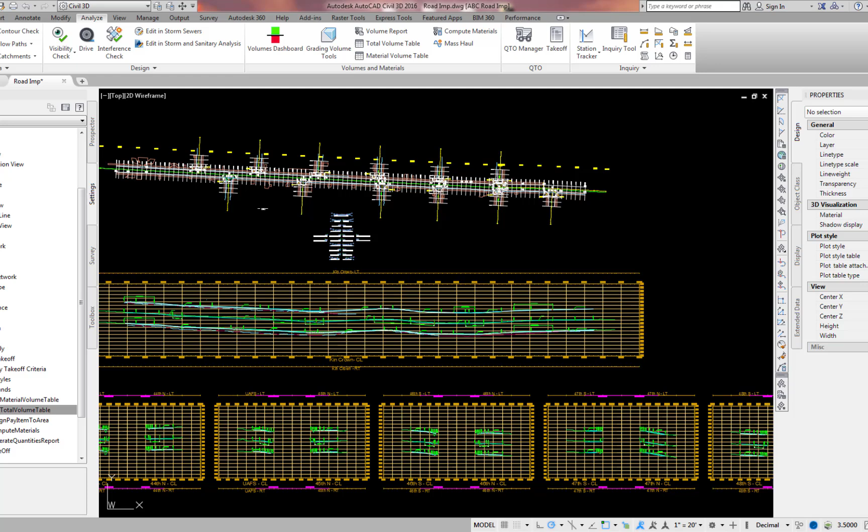Total volume tables. Earthwork cut and fill volumes are computed from cross-sections between the existing and datum surfaces using the average end area method. The volumes are computed separately for each sample line group. The sections are taken at the locations of the sample lines.

Quantity takeoff defaults: Settings, right-click Quantity Takeoff, Edit Feature Settings, Default Styles, quantity takeoff criteria, earthwork, material shape style, earthwork, default name format, material name template, material next counter, material list name template, next material list counter.

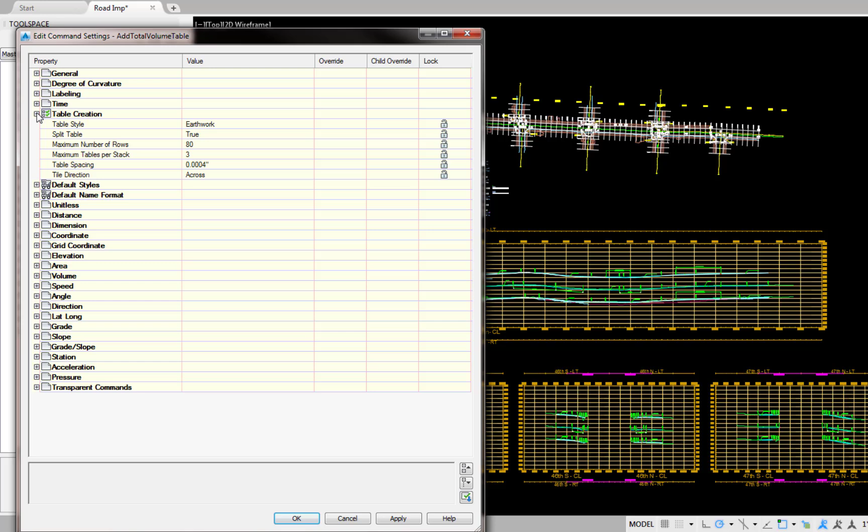OK. Expand Quantity Takeoff, Commands, right-click Add Total Volume Table, Edit Command Settings, table creation, table style earthwork, split table true, max number of rows 80, max tables per stack 3, table spacing 0.0004 inches, stacks are adjacent to each other, tile direction across, OK.

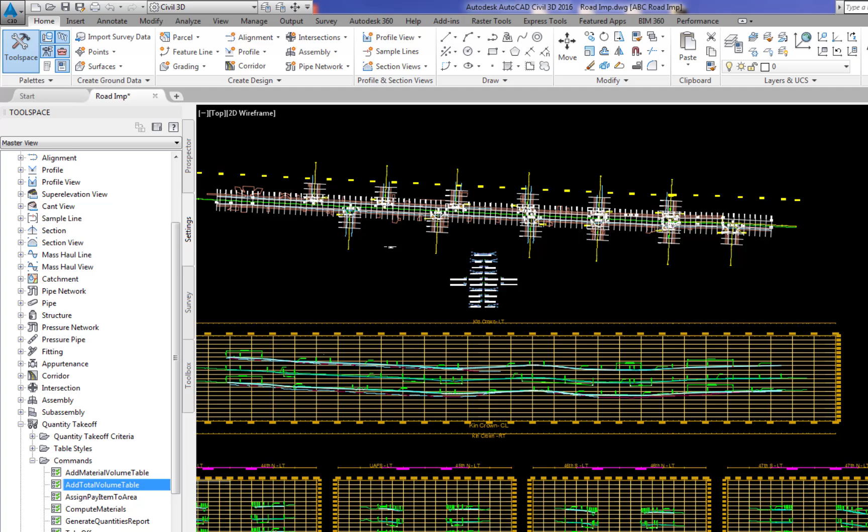Compute earthwork quantities for the Kincaid alignment: Prospector, Corridors, right-click Kin corridor, Rebuild. Analyze ribbon, Volumes and Materials panel, Compute Materials icon, select alignment, Kin Crown, select sample line group, SLG Kin Crown Road, OK.

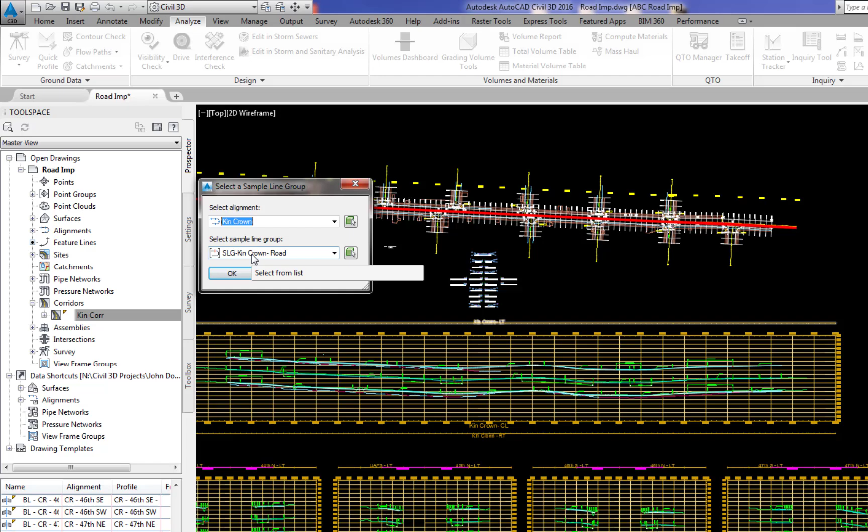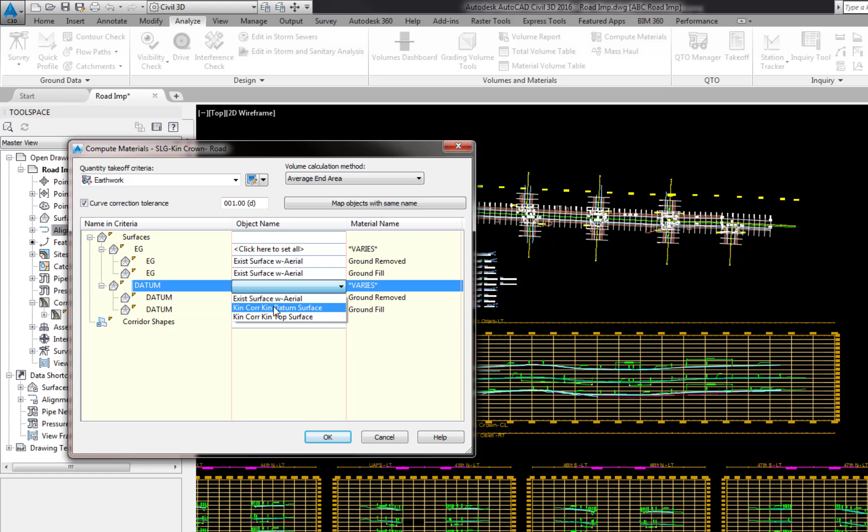Quantity takeoff criteria, earthwork, volume calculation method, average end area, curve correction tolerance, yes, place check mark, 1.00, leave as default. Surfaces: EG, click here to set all, existing surface with aerial; Datum, click here to set all, Kin datum surface, OK. Repeat previous steps to compute the earthwork volumes for each side road.

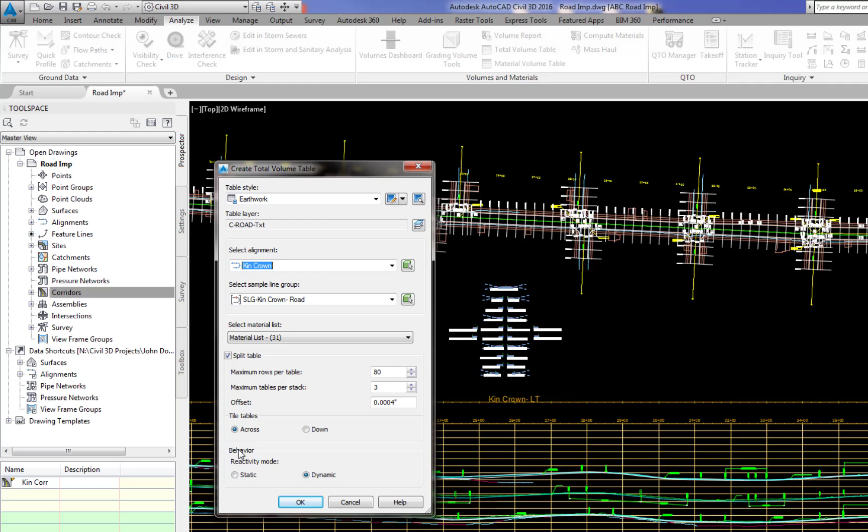Create earthwork volume table for Kincaid: Analyze ribbon, Volumes and Materials panel, Total Volume Table, table style earthwork, layer C-ROAD-TEXT, alignment Kin Crown, sample line group SLG Kin Crown Road, select materials list, leave as default, split table yes, maximum rows per table 80, maximum tables per stack 3, offset 0.0004 inches, tile tables across, behavior dynamic, OK.

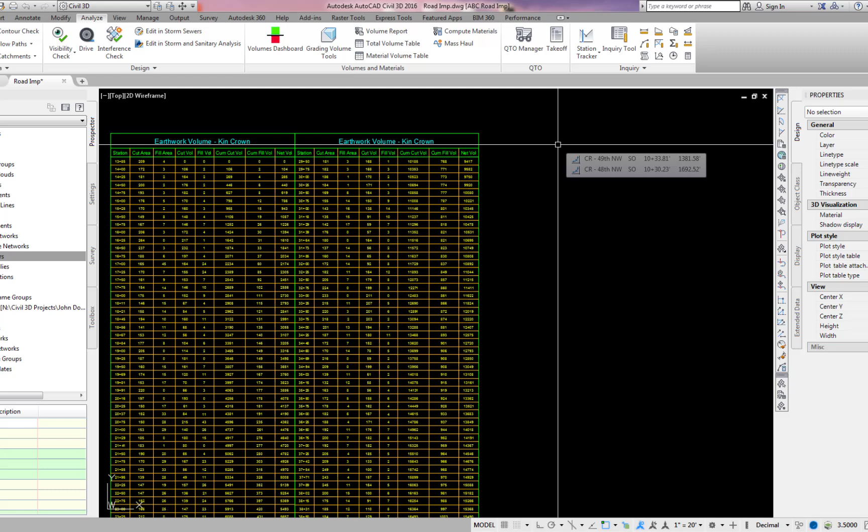As prompted, select location in clear area to the right of the Kincaid profile for the top left corner of the table. OK. Repeat the previous steps to create the earthwork table for each side road. Draw a temp 50-foot horizontal line from top right corner of Kincaid table. L, enter. 50, enter. Place top left corner of the 44th North table at end point of line.

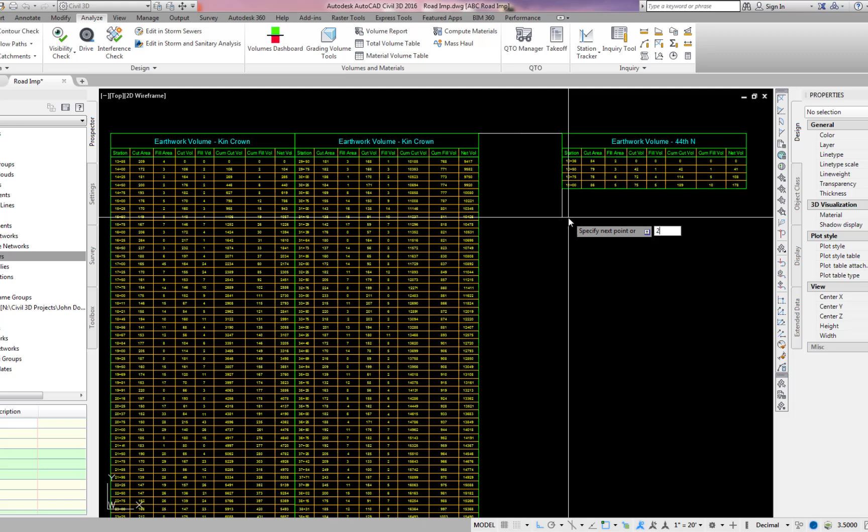Total Volume Table. 44th North, OK. Draw a 25-foot vertical line from the bottom left corner of the 44th table. L, enter. 25, enter. Place the top left corner of 44th South table at end point of vertical line. Volume Table. 44th South, OK. Continue for remainder of side roads. Use a spreadsheet to tabulate the cumulative volumes of cut and fill from each alignment.

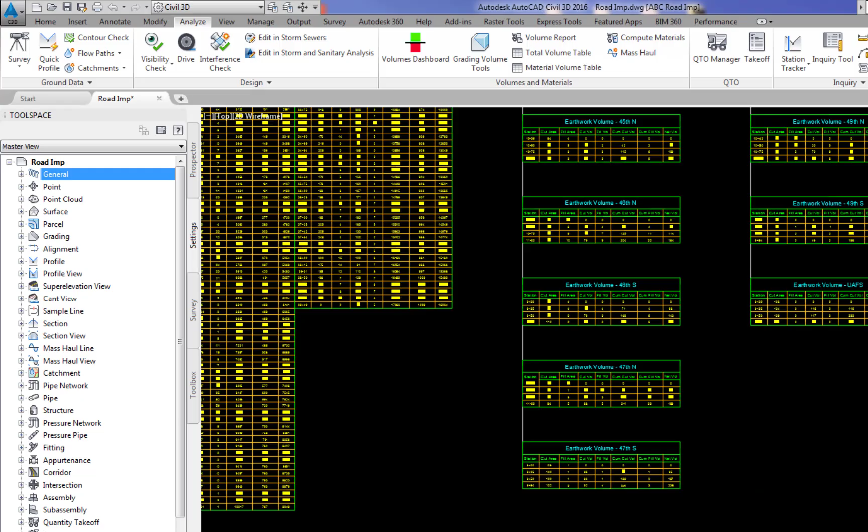Create total volume label: Annotate ribbon, Add Labels top part, Feature, Note, label type Note, label style Note 0.15 with border, marker style none, Add, pick in a clear area, Escape, pick note, right-click, Edit Label Text, total cut volume 19,500 cubic yards. Enter to start a new line.

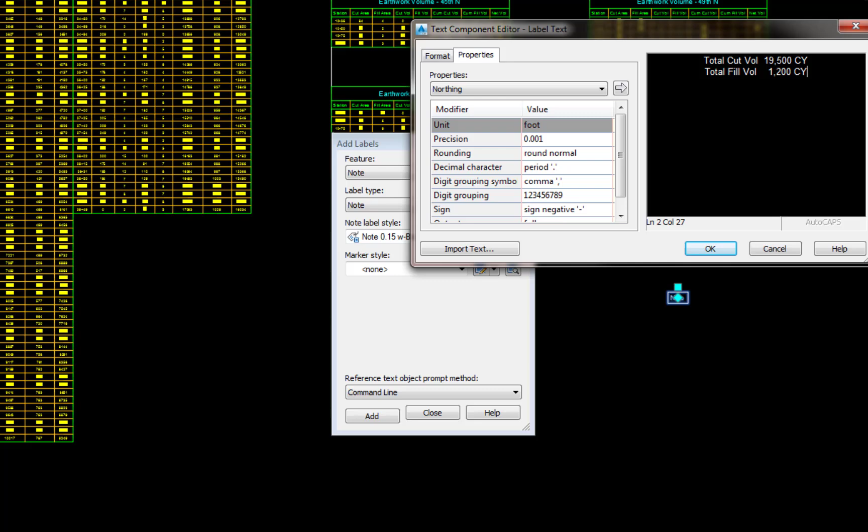Total fill volume 1,200 cubic yards. OK. Pick note, and move to desired location. Escape. Only use 3 significant figures for earthwork volumes. A greater accuracy is not justified.

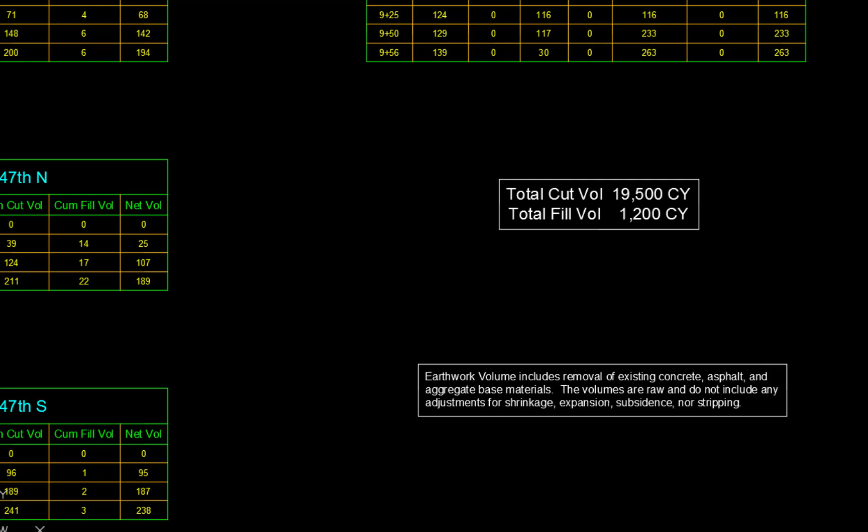Use same procedures to create a second note with label style 0.10 with border that reads, Earthwork volume includes removal of existing concrete, asphalt, and aggregate base materials. The volumes are raw and do not include any adjustments for shrinkage, expansion, subsidence, nor stripping. A sheet border around the quantity tables will be created in a subsequent video.